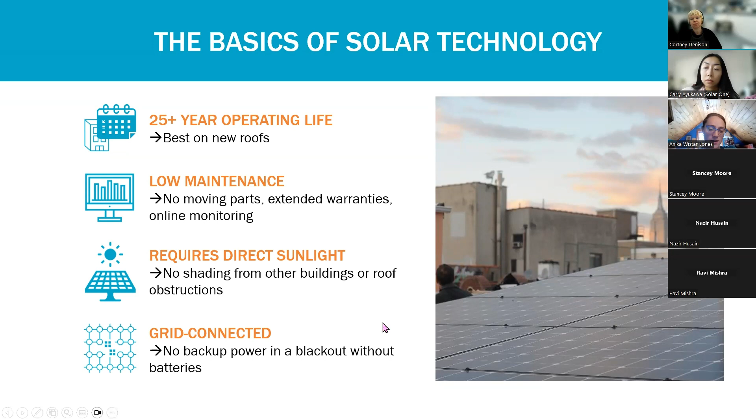So it's a safety feature to turn the systems off when there's a blackout as well. So just keep in mind that it's not backup power that we're talking about here. It's mostly for saving money on electricity bills.

There are three main types of solar panels or arrays that we see. There are ballasted arrays, which are just weighed down with blocks, with no or very few mechanical attachments to the roof, so you can put them on many different types of roofs. They're very easy to install and generally pretty cheap. But as you can see, they take up a decent amount of space with space between the rows.

The other option is a mechanically attached planar array. Sometimes people call it a shed array because it looks like a shed. These ones are attached to the structure of the roof and flashed, usually either the roofer themselves does it, or they get a roofing manufacturer approved method so that the roof warranty stays despite the penetrations.

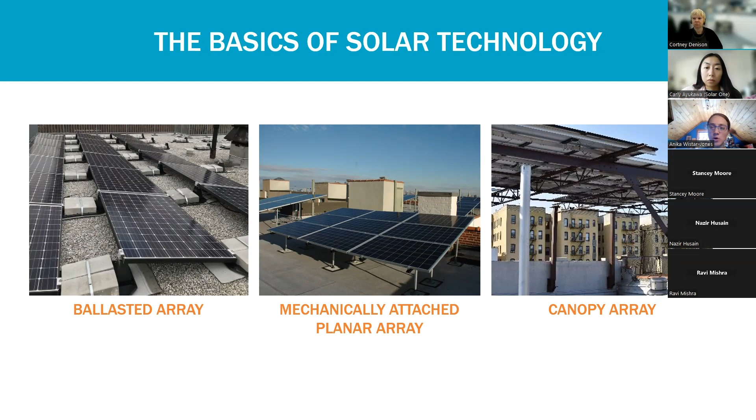And then the other option is a canopy array, which is similar to a mechanically attached array, except it's raised at least 9 feet in the air so that you can walk underneath it. You can put anything you need to underneath it. It's more expensive, but it's also more versatile. So those are the options that people have when they're considering solar.

So now I want to talk about Local Laws 92 and 94. Can I get a quick poll check on how many people are familiar with Local Laws 92 and 94? Is this something that you know about? Yes. Okay, great. So you all know green roofs or solar on new roofs. So that means roofs that are either completely new or a new roof assembly, which is basically completely new.

But until November of this year, affordable housing has been exempt if the solar is financially infeasible. And so that's where the Solar Where Feasible program originally came about. This is expiring in November, so we'll talk about what that means later on.

So Local Law 92 and 94, this mostly only applies to new construction buildings, but some substantial rehabs, if you're doing the entire existing roof deck or the whole assembly is being replaced, then that applies as well.

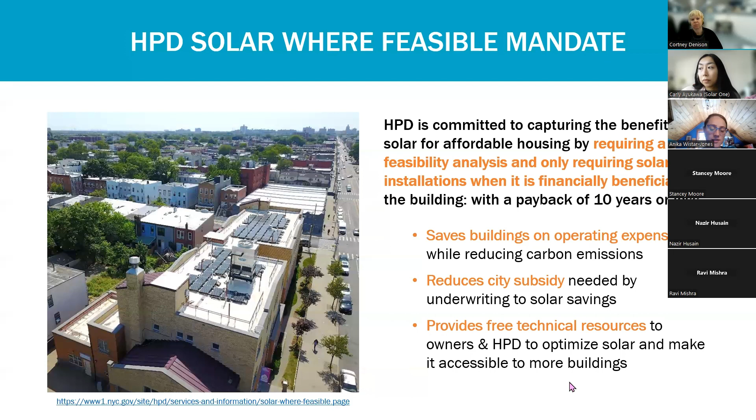So this is good because it saves buildings money on operating expenses. It reduces carbon emissions. It also reduces the city subsidy for these buildings so that you can underwrite to the solar savings and be able to do more rehab work that's necessary. And we provide these free technical resources to any owners and HPD staff and really anyone involved to help optimize solar and make sure that it's the right system for the right buildings and it's accessible to as many buildings as possible.

So that's us, Here Comes Solar. We are a program of Solar One, which is an environmental education nonprofit, and we work to make solar accessible to high barrier sectors. So we work especially with affordable housing, multifamily housing, low income homeowners, and we do free technical assistance from the very beginning of a virtual site assessment to see if solar is even viable on a roof, all the way through solar installer selection and advocacy during installation if necessary.

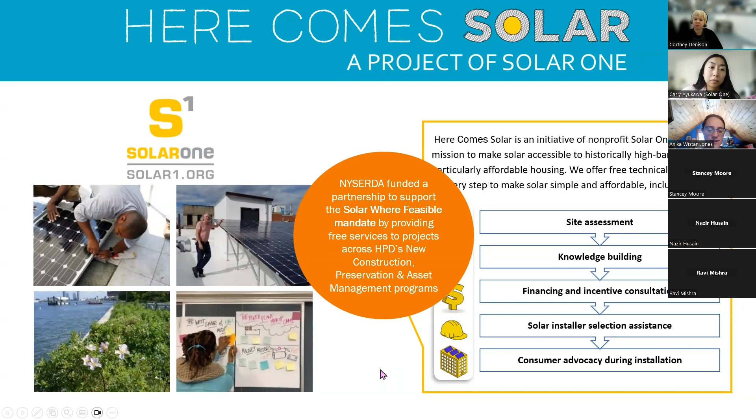NYSERDA has funded our partnership with HPD. So the Solar Where Feasible program is funded by NYSERDA so that we can provide this free technical assistance to anyone who is now or has ever received HPD funding. Okay, so I'll pass it off to Carly to go over the details of the solar feasibility analysis.

Cool, thank you, Anika. So as Anika mentioned, HPD has the Solar Where Feasible program, and a really crucial component of this program is the solar feasibility analysis. It's a tool that can help you determine whether solar is going to be required, and it's also a tool that can help you really optimize your solar project and achieve the energy goals that you've set out for your project.

So to start, this is a very small screenshot, so you don't have to read the text because we're going to go in one by one. But basically, there's inputs required by the applicant to submit a solar feasibility analysis. It's an Excel tool with multiple tabs, and the applicant needs to submit a completed analysis with inputs filled out on the building information tab, project information tab, roof layout tab. And if you do all those things, a results tab is going to be populated with a payback period, and then it gets submitted to us.

Solar One takes a look at what you've submitted. We help to make sure that everything's filled out completely and accurately. And we really look into things to make sure that the incentives check out, that all the assumptions are as realistic as possible. And that gets sent to HPD for their review and approval.

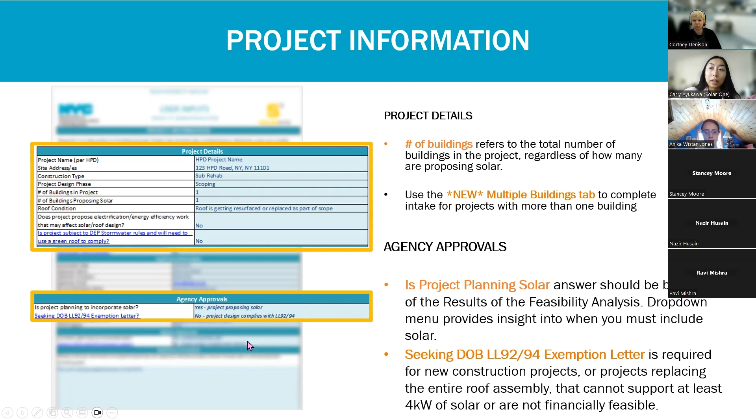Pretty straightforward information. The input that's probably the least straightforward is estimated usable roof area for solar. We've actually dedicated a few slides later on in this presentation to go over how you determine this number. A helpful tip is that when you're hovering over these cells on Excel, little pop-out comments will show up, and those can help provide guidance about how to answer these inputs.

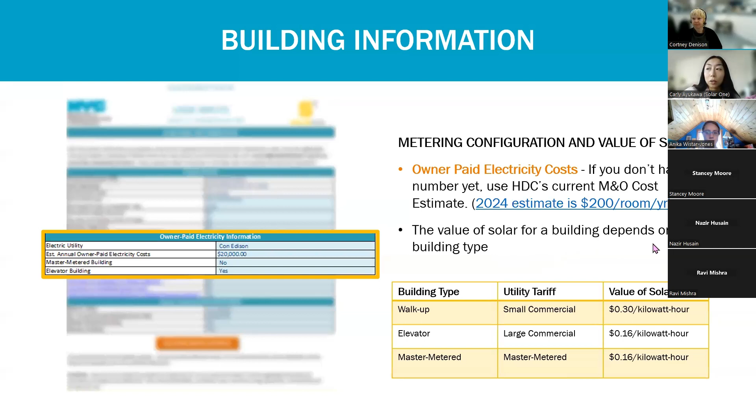So this is the multiple buildings tab. It's exciting because prior to this tab being introduced, we had to receive multiple submissions for multiple buildings under a single project. So let's say you have a cluster project with 10 buildings. What you're gonna do is fill out this tab with all the information about the project and about each building.

Something to note is that this tab doesn't connect to the formulas. It's more of an intake page because Solar One has to do some back-end portfolio analyses for the buildings. And so there's an extra step involved with multiple building projects, but this will help simplify and streamline the process.

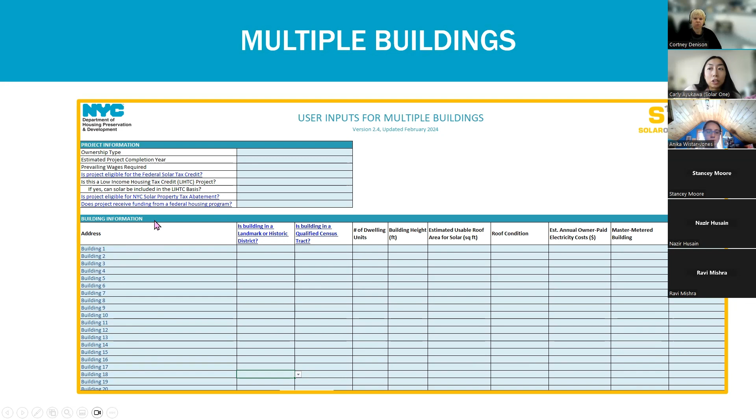The next tab that we have is advanced inputs. It's a hidden tab that you can open by pressing this orange button at the bottom of the building information tab. It opens up and it can be used to input specific information that you've pretty much confirmed about your project. So let's say you already have solar plans, designs, and costs. You could fill in fields that are confirmed.

We ask that you only include fields that you actually need and are confident in, because these fields override the assumptions in the tool. And so they're really meant to be used when more concrete information is known. At any time, you could press clear advanced inputs and then the analysis will go back to the default.

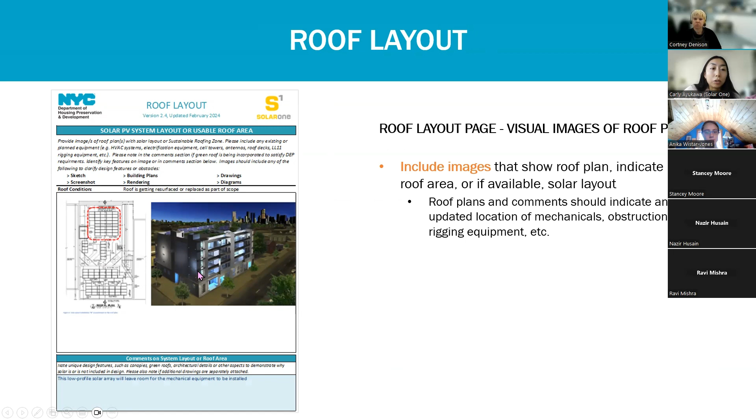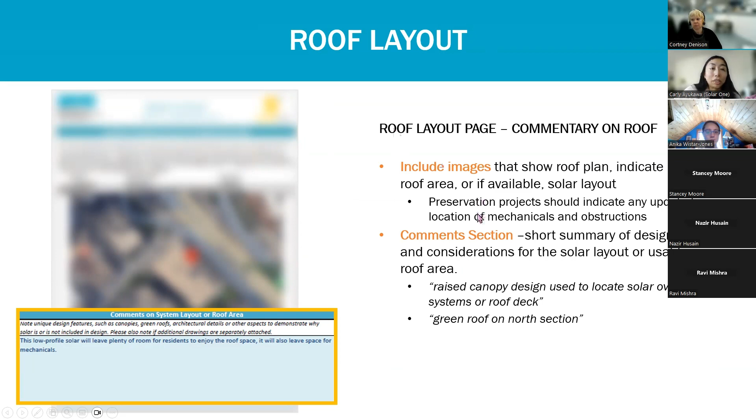So an example of what you could include is, we're doing a raised canopy design and it's gonna go over the HVAC systems, or there's a green roof on the north section. Sometimes roof plans are not easy to interpret, so any extra information that you can provide is really helpful to us.

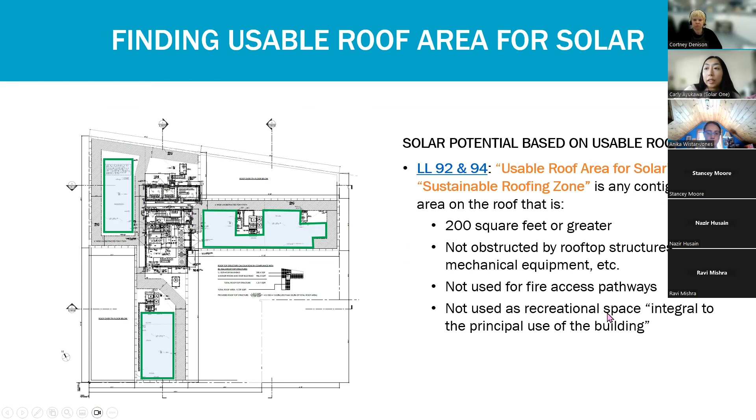Okay, so as I mentioned, one of the inputs on the analysis is estimated usable roof area for solar. And according to Local Law 92 or 94, usable roof area for solar, which is also known as the sustainable roofing zone, is any contiguous area on the roof that's greater than 200 square feet, not obstructed by structures, mechanical equipment, etc., not used for fire pathways, and not used as recreational space that's integral to the principal use of the building.

So what you do is you outline the sections and you add up the square footage, and whatever the sum is, you fill that in on the estimated usable roof area for solar.

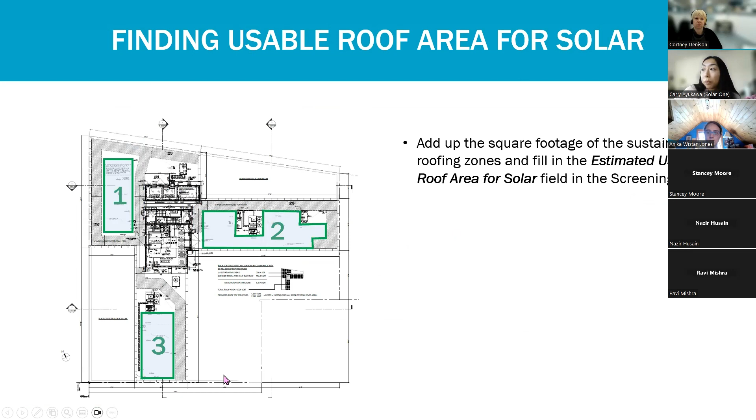Now, I mentioned fire paths. Some tips about that are that fire paths need to be 6 feet. These are all rules from the FDNY. They need to be placed along street-facing sides of a building. Not only that, they need to be connected to all roof exits and run from the front to the back and side to side of the roof.

So you have to imagine that you're in the position of the FDNY going to this building in an emergency. How are the firefighters going to get onto the roof and access it without any obstructions? Now, where possible, fire paths should be placed along the perimeter of the building, not just cutting right through. It's efficient if they are placed in shaded areas of the roof, like along a bulkhead, and that allows us to really maximize the usable roof area for solar.

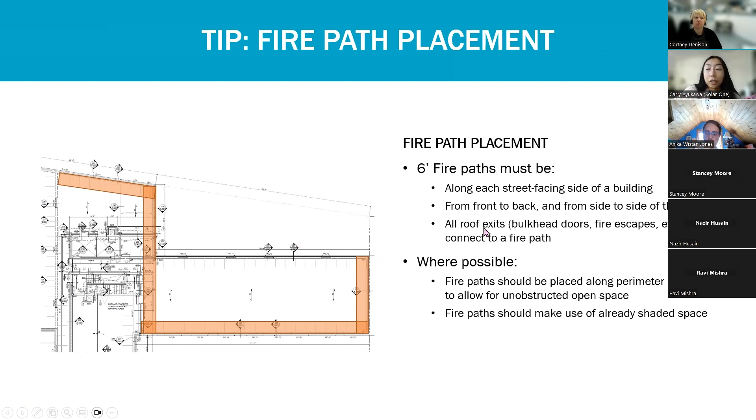A lot of people calculate the usable roof area for solar using CAD and things like that, but a tip is that you can actually get the measurements with Google Maps. So when you go on Google Maps, you want to type in the address of your building, go to satellite view, and then you right-click the map and you select measure distance. And then you're going to click the shape that you want to measure. And that shape's going to be less than the exact perimeter to account for the fire paths.

And then once you close the shape, you can get the total area, and that's what you'll input into the tool. So as you can see, we clicked along this perimeter, avoiding the bulkhead and the 6-foot clear path. And then we got around 1,400 square feet, and that's what we would plug into the tool.

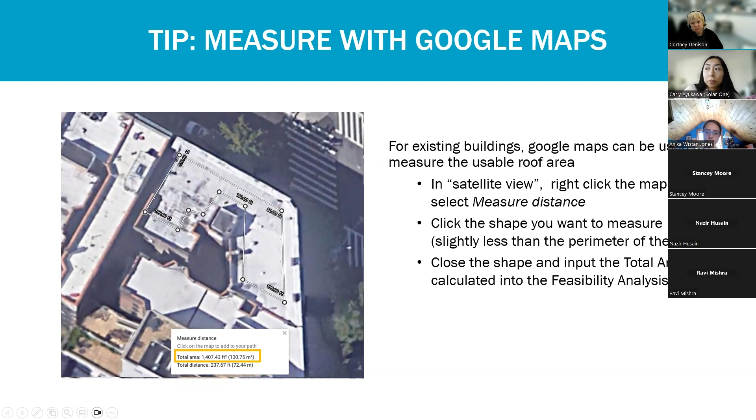Now, once all these tabs are filled out, the tool is going to push out the results tab. It tells you what the solar feasibility is. And something that's cool about this tab is you could toggle the inputs on or off, and you can immediately see how the payback period goes up or down.

You could also increase the usable roof area for solar and see how much more solar you could fit on your roof. So it's a really helpful activity to play around with the inputs and see what factors impact the payback period. Something to note on the results tab is there's this button where you can go to our intake page and upload the feasibility analysis when you're ready.

And yeah, the main update from February is that we broke down the results page to be easier to interpret into these buckets. And we're looking forward to your feedback if you have any. We're always open.

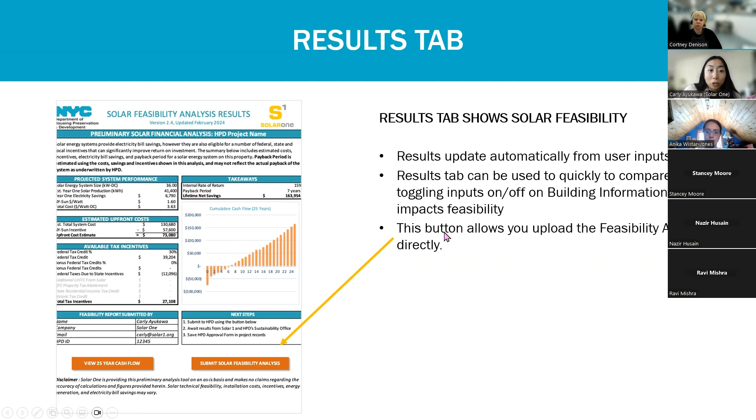On the results tab, we have the projected system performance. So what is the estimated system size that can fit on your roof? How much can it produce in kilowatt hours per year? What does that mean for electricity savings in the first year? What level of the New York Sun incentive is this project eligible for? And what's the estimated dollar per watt?

From there, you can look at the estimated upfront costs for the system. So the estimated total system cost is calculated by multiplying the system size in watts by the dollar per watt estimate. So 36,000 times 3.63 is this estimated total system cost. And the New York Sun incentive is calculated by multiplying the New York Sun level by the system size.

And then there's a little equation here to show you how the estimated total system cost gets reduced by the New York Sun incentive, and that's the upfront cost estimate. That's how much is owed to the installer. And something about the New York Sun incentive is that it gets paid by NYSERDA to the installer at the end of the solar project's completion.

The takeaway section tells you the IRR, the payback period, and the estimated lifetime net savings for the solar system. And then this available tax incentives box will show you what incentives were included in the analysis. So for this example, the federal tax credit, which is 30%, was included. And that amounts to $27K after the taxes due to state incentives, which is the New York Sun incentive.

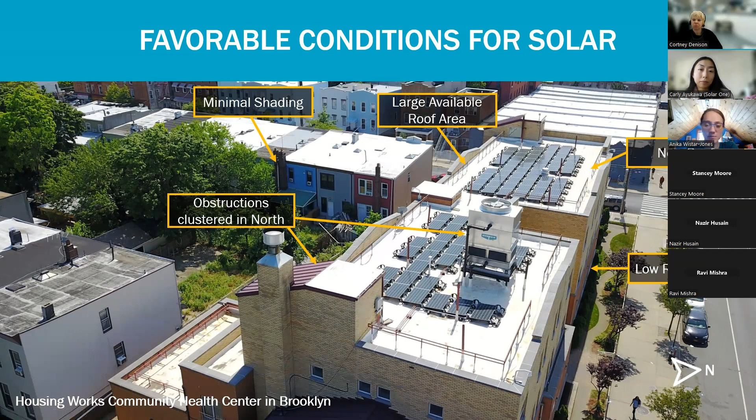So it's good to know where is a good place to put solar panels and how to configure a roof well. So the things that we're looking for when we're looking for favorable conditions are large contiguous areas for the roof, minimal shading, so not a ton of taller buildings, a new roof, like Carly mentioned, because solar panels have a long lifespan, a new roof is good. Generally, lower buildings are cheaper and easier, and that helps with the cost.

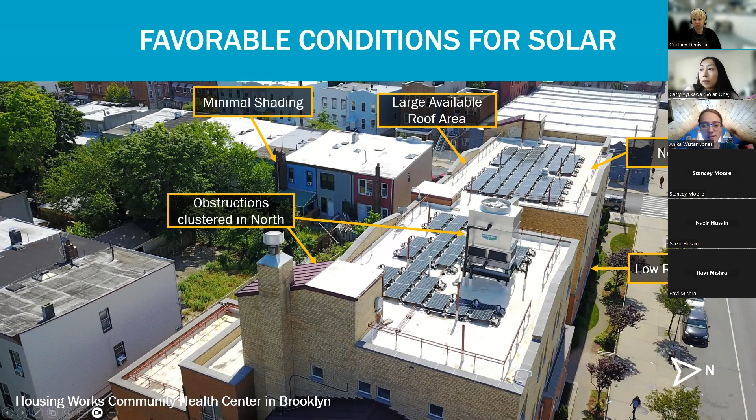And making sure that the obstructions, to the extent possible, are clustered in the north of a building so that they don't shade the solar panels. If they're in the south, then they produce more shade than if they're in the north.

Some tips on the feasibility analysis. You should fill in all the fields, especially on the building inputs. If you have questions about it, you can always ask us at affordable@solarone.org, and we can help you figure out what to put in each field. We encourage you to explore the different inputs and what that would mean for the feasibility. Maybe it makes more sense to do a canopy or a ballasted system, for example. Maybe it makes more sense to look into some of the different incentives that might be available.

And please write as much as you can in the narrative sections. We have narratives on many of the pages, and the more we know about a project, the better we can provide assistance. We also encourage you to read the comments on the Excel sheet and the links that they link out to. There's a lot of really great information there. And at any point, you can email us. We're pretty good about responding to emails with questions, and happy to answer anything that comes up.

Most importantly, if the project changes at any point throughout the process, you can always rerun the solar feasibility analysis. So we intend this to start at the very beginning and be a high level estimate at the outset. But if you learn more throughout the process, you can send in a new one. And that's why we added that extra line for the stage of the solar feasibility analysis. So we know, is this at closing? Is this at the initial scoping? Is this right before installation? And so it's very useful to be able to run it with as much new iterative information as you have.

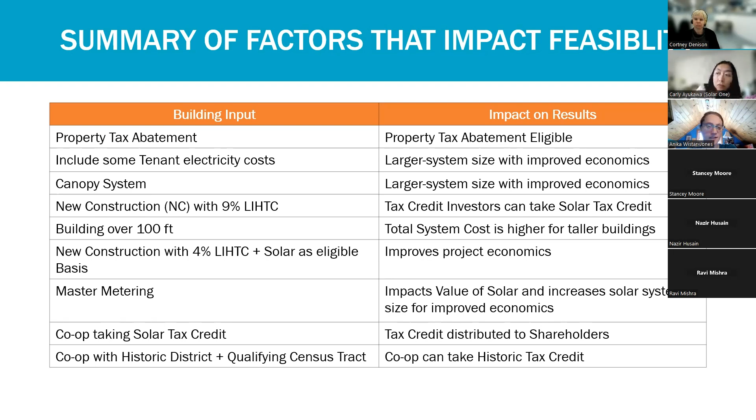And I'm not going to go through every single one of these, but it's useful to know what the rubric is for choosing whether solar is required or recommended or not recommended. So if a project has a 10-year payback period or less, then it's generally required. If it's less than 15 years, but it has some of these benefits, then it's usually recommended. And if it has many benefits, then it's strongly recommended. If it's greater than 15 years, but it still has some benefits or multiple benefits, then it might be recommended. But we might also work with you to consider redesigning it to make it more cost effective. And if it's over 20 years, we probably would never recommend it.

If there are projects that are seeking a DOB exemption letter, first of all, we're going to note that this is only true for the next couple months. The exemption letter won't be available after July. But you would get that if it can't accommodate a 4-kilowatt system, or if it's financially infeasible by the 10-year payback period. And we'll talk about that more in a second.

Yeah, let's go on to questions. The first question I saw in the chat was if ballasted systems are compliant with the building code requirement for wind load. I answered that in the chat. Yes, ballasted and mechanically attached planar systems and canopy systems, all solar systems, are required to withstand at least 110 mile per hour sustained winds, which is what's in the building code. So yes.